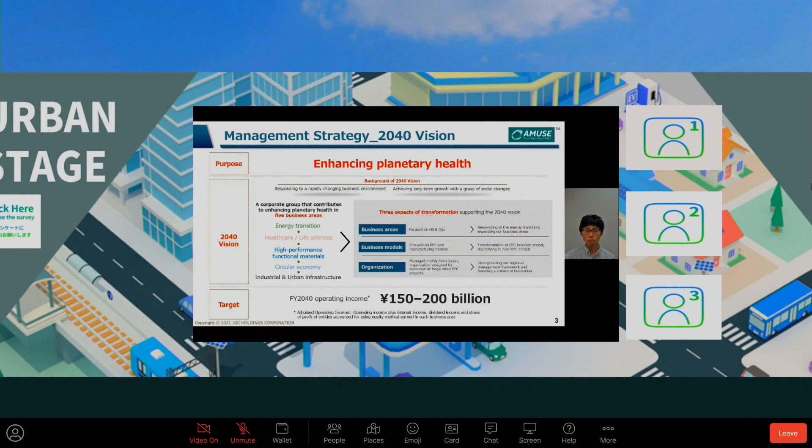As I said on the previous slide, in order to achieve energy transition for the future, JGC Group considers that we should contribute to the reduction of CO2 emission, because a large amount of CO2 is emitted from our main business field. So far, we have already experienced building plants related to reducing CO2 emission, such as mega solar plants, CCS plants, and CO2-free ammonia plants. Especially CO2-free ammonia, if it becomes a major fuel for power plants, we believe that it can reduce CO2 emission drastically, since most CO2 is emitted from power plants.

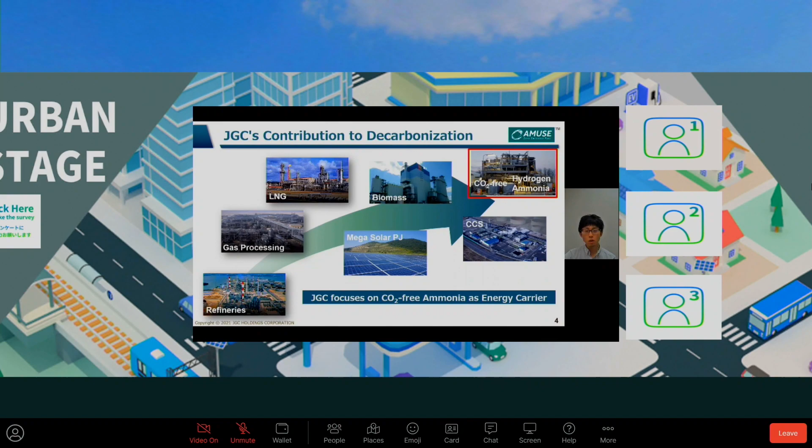Then, JGC is focusing on CO2-free ammonia from 2 points of view. One is that CO2-free ammonia is a promising energy carrier. The other is that it also has the potential to be an alternative energy to oil and natural gas. Today's agenda is shown here. At the beginning, I introduce the CO2-free ammonia supply chain scheme. Next, I am going to highlight the previous problems for green ammonia production. Then, to solve the problems of green ammonia production, I'd like to introduce our solution for green ammonia production. After that, I introduce JGC's demonstration project.

At the virtual Global Climate Summit, Japan's government announced Japan's goal of a 46% reduction in greenhouse gases by 2030 from 2013 levels. In order to achieve this commitment, there are several ways. Along with renewable energy, hydrogen, electrification, and CCS, ammonia fuel is one solution. Ammonia fuel can be used as a fuel in power plants by ammonia co-firing technology, or as marine fuel.

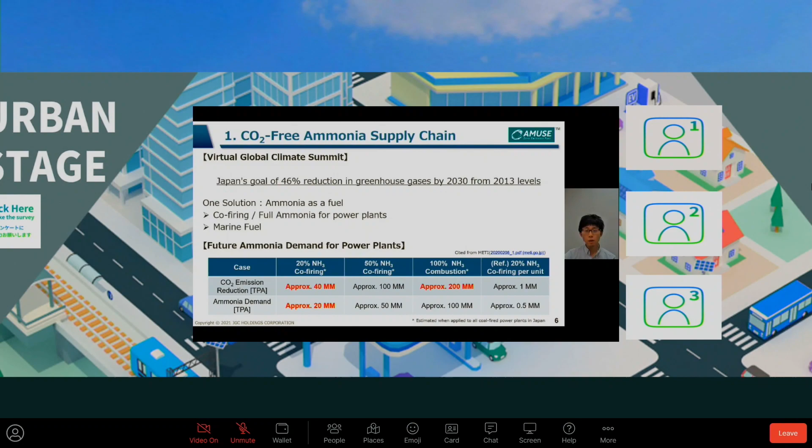Based on the Ministry of Economy, Trade, and Industry's estimation, future ammonia demand for power plants as a fuel is huge. In case 20% ammonia co-firing is applied to all coal-fired power plants, total ammonia demand would be 20 million tons annually. As this table shows, the ammonia market has huge potential.

This is Japan's roadmap for ammonia fuel introduction. As this figure shows, Japan starts ammonia co-firing around 2028. Not only power generation, but also marine fuel will be adapted. Moreover, to realize an ammonia fuel economy, the ammonia supply side is to be ensured. The supply side action target is also shown here.

This slide shows the CO2-free ammonia supply chain scheme. In regard to production of CO2-free ammonia, there are two routes. One is from renewable energy, called green ammonia. The other is from conventional fossil fuel, such as natural gas with CCS, called blue ammonia. For fuel usage, blue ammonia would be the first option because of the cost.

At this conference, we highlight the renewable energy route. The green ammonia route is the ultimate goal to produce CO2-free ammonia in the distant future. As for transportation, ammonia can be transported easily with existing technology. For utilization, ammonia has some potential for power generation, including new technology.

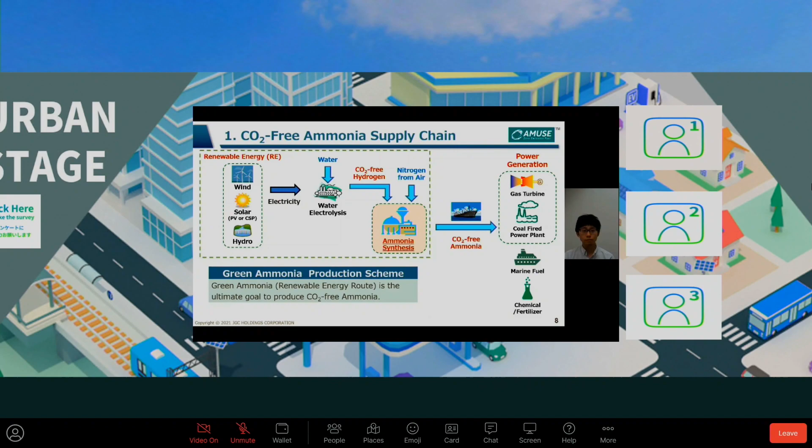However, there are some problems in green ammonia production. First one is the cost of hydrogen production. It has huge impact for ammonia production cost, but this is out of scope of my presentation. We expect renewable energy cost down and water electrolyzer cost down in the future.

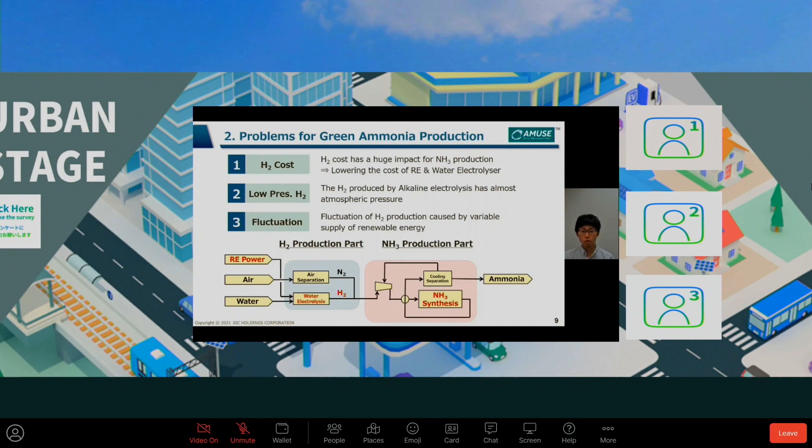Second one is hydrogen from renewable energy has almost atmospheric pressure. Very low pressure hydrogen is generated, so overall energy efficiency should be improved. Last one is the fluctuation of hydrogen production rate caused by using variable renewable energy. Green ammonia plants have to handle fluctuation and manage hydrogen balance.

To solve problem number 2 and number 3, we performed demonstration projects supported by SIP Energy Carriers. To realize small-scale plant, we developed new ammonia synthesis catalyst, which achieves high performance at lower pressure and lower temperature. The new ruthenium catalyst supported on cerium oxide was developed as this picture shows.

This picture shows the appearance of our demonstration plant. The liquid ammonia capacity of this plant is basically 20 kg per day.

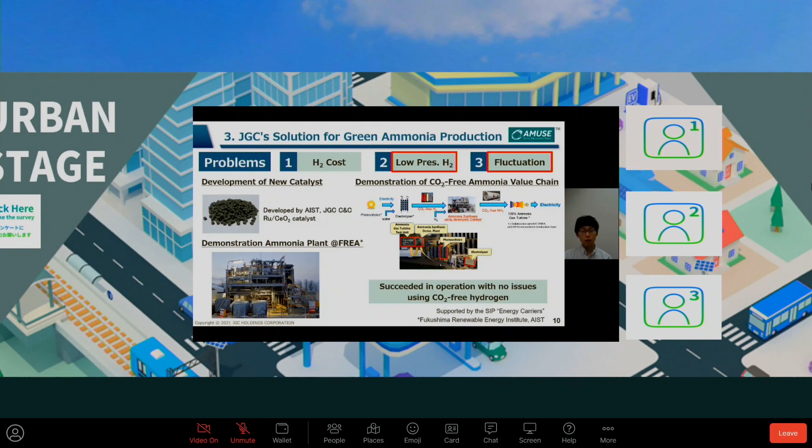Next, I introduce the result of demonstration of CO2-free ammonia value chain. Hydrogen is generated at water electrolyzer by PV electricity. That CO2-free hydrogen was charged to the cylinder and moved to our demonstration plant to use as feedstock for ammonia synthesis. We generated the CO2-free ammonia and charged it to liquid ammonia tank, and it was used as fuel at ammonia gas turbine test unit. This is collaborated with AIST FREA and SIP ammonia direct combustion team.

From here, I introduce our developed simulation tool. This tool is calculated on hourly basis. In green ammonia plants, there are several facilities, for example, renewable energy, water electrolyzer, hydrogen buffer tank, and ammonia synthesis loop. By using this tool, we can check each facility's whole year availability.

Through a whole year, hydrogen tank level is to be avoided empty to prevent sudden ammonia plant shutdown, so that ammonia plant operating loads need to have a flexibility corresponding to renewable energy profile and hydrogen tank level. Moreover, we can check overall balance at particular time.

In this simulation, we have extensibility for electricity user, for example, grid and battery, hydrogen generator. Other than that, we can calculate hydrogen balance and power balance at a glance. JGC is now going to continue updating this simulation.

As a useful function, this tool can calculate the hydrogen and ammonia production cost three-dimensionally. In this left graph, x-axis is hydrogen tank capacity, y-axis is water electrolyzer capacity, z-axis is production cost. In right graph, x-axis and y-axis are same, then z-axis is ammonia plant shutdown count through a year. By using this tool, we can design the best green hydrogen and ammonia facility economically.

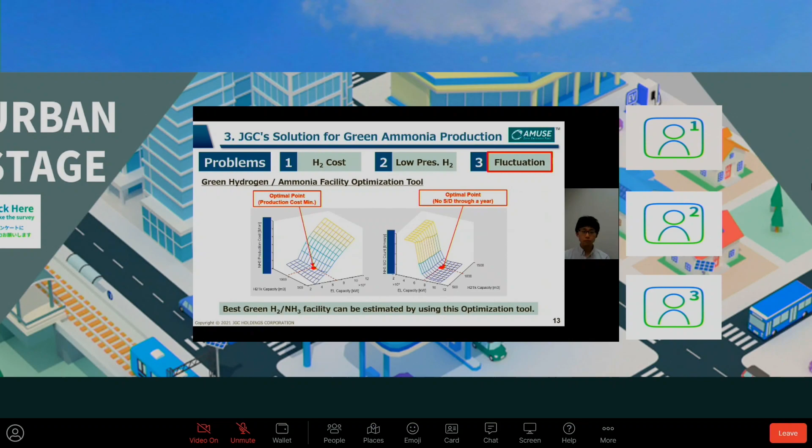From here, I'd like to introduce a demonstration project. Japan chemical maker Asahi Kasei and JGC Holdings Corporation are adopted and funded by NEDO's Green Innovation Fund, which is realizing decarbonization society. JGC is going to execute this demonstration project of green chemical plant using a large-scale alkaline water electrolysis system in collaboration with Asahi Kasei. We are targeting Japan's first sub-commercial scale demonstration of green ammonia to start in 2024.

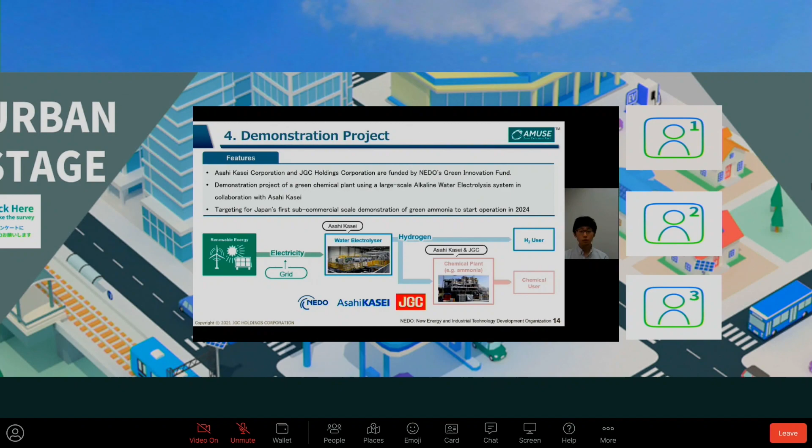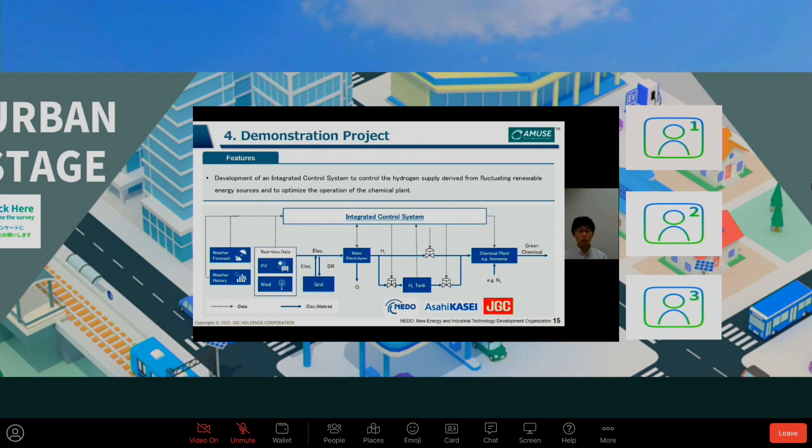In this demonstration project, Asahi Kasei and JGC are going to develop integrated control system. Green ammonia production's problem is feedstock fluctuation, variable renewable energy. This system aims to manage the overall hydrogen supply balance and to optimize the operation of the chemical plant based on the weather information and current status. We believe that this system would contribute to the green chemical plant availability improvement.

Simulation tool developed by JGC would contribute to basic design to optimize overall design capacity of green ammonia plant, consisting of renewable energy, hydrogen tank, water electrolyzer, etc. JGC aims to achieve green ammonia economical production through a demonstration project.